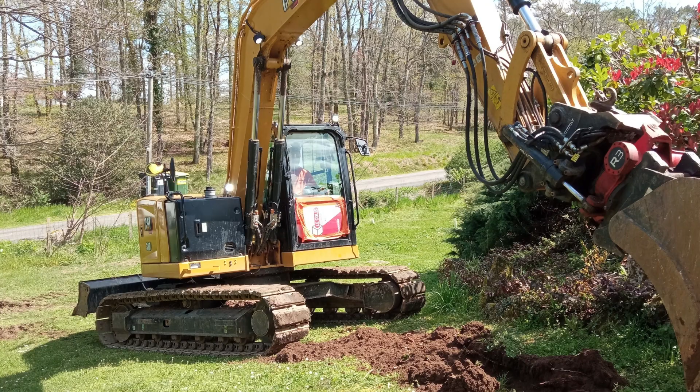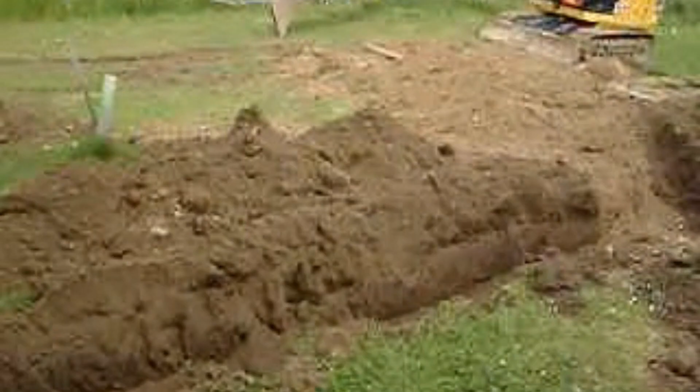So I'm going to try and make this little video showing you the new layout for pipes for our septic tank and the new filter bed. So pipes are going in here, that's the one coming from our main house, and in here, that's coming from our gate, right through the centre of our orchard. I've got to say, the guys doing the work have been great. The rest of the orchard, away around the corner there, is fine.

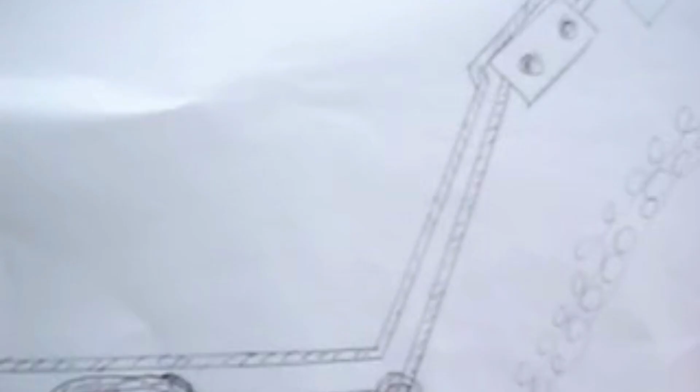It's going to continue tomorrow, so we'll see how it gets on. But this is only the trenches for the pipes, and there's already an awful lot of soil to get rid of. Here's the plan. You can see they've got to put a vent up the side of the house, a pipe going down to the septic tank, and then the air vent coming back up, and the septic tank filter bed should go about there. So we'll see how that goes.